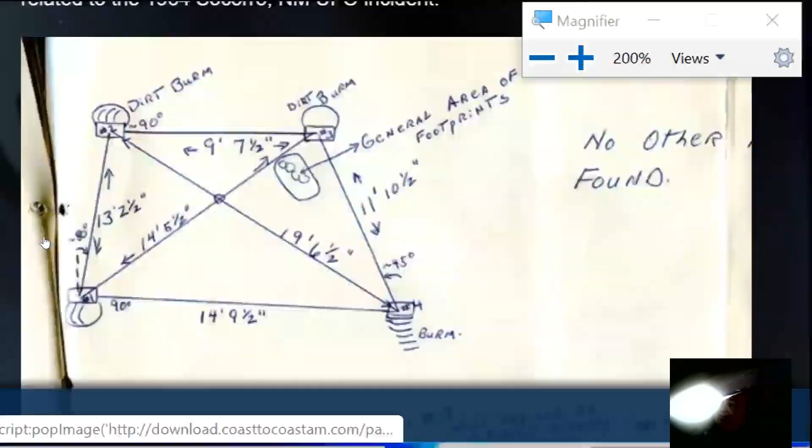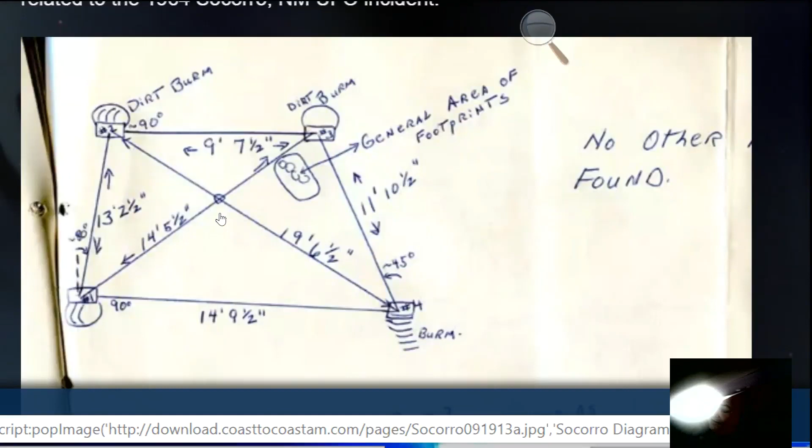So yes, this Socorro UFO that landed, they made some measurements in Project Blue Book. Now here it says it's 10.5 feet, although they say it rounded up to 11 here, so I'm not too sure what they mean. Maybe it skidded, maybe it skidded about a foot difference. I think that's what it's saying here. So maximum length was 11 feet, and the minimum was 10.5 feet.

And going this way it was 9.5 feet to 14 feet, I think that's what they're trying to say there. There it goes, rolls, okay John. Yeah, and here it's saying it's 13 feet, I suppose that's 12.5 feet to 13 feet that direction. So it looks like when it landed, the 3 landing pods stretched apart.

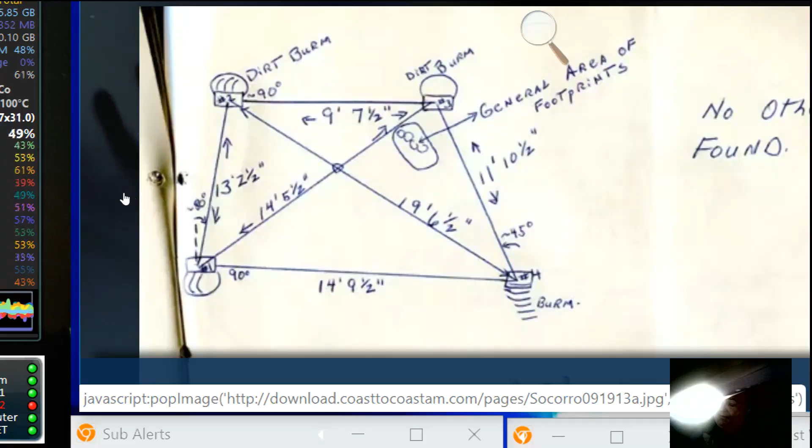So here it's saying 7.5 feet to 9.5 feet. So we compared this to the actual lunar module that they were testing, Surveyor 2 out that, well Surveyor 1, Surveyor 2, Surveyor 3 out that way. They had different things appended to it, different prototypes. One didn't have a robot arm, and Surveyor 3, I think they had this robot arm on.

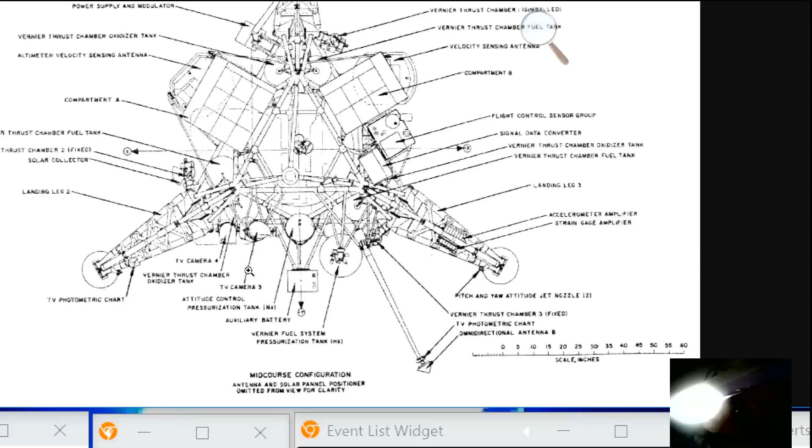Now, if you have a look at this scale here, it talks about inches. So you can see here, it's 80 inches apart probably, on this diagram here of the landing pods, 3 landing pods. One direction looks bigger though. Let's see, shame we can't put that scale going this way. It looks like 2 of those and a bit, so it looks like 100 that way,

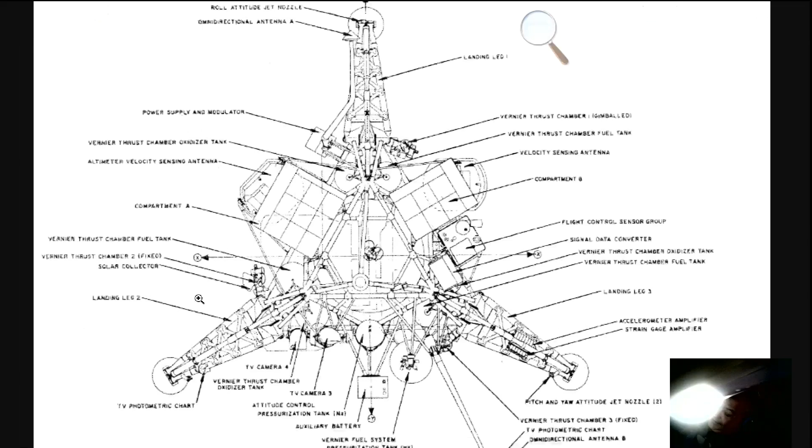Did you right click on it and give him thing? Or do you... I've given him everything he needs. I've just sent a message. I can see him inside now, so you have. Yep, yep, cool.

So 100 inches is 8 foot, which kind of matches that diagram which I'm showing you here of the measurements they took there. So 7.5 to 9 foot is 8 foot there. So obviously the pads will stretch as more weight's put onto it, it flexes with the terrain, so it becomes stable as it lands.

So what's 80 inches? 80 inches, 6 foot. That can't sound right. So where have I gone wrong?

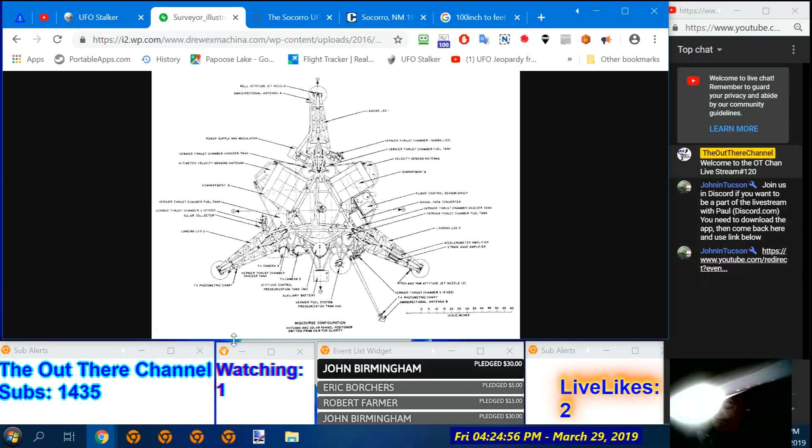Okay, let's see. Okay, I need a YouTube channel, don't I? Oh no, you're on the live stream now. Oh wait there. Yeah, so you just mute the live stream if you've got the right one and it should be displaying. But we've had no, it's not. If you've got the right one it should be displaying. Just make sure it's muted though, because you don't need to hear it. It's not.

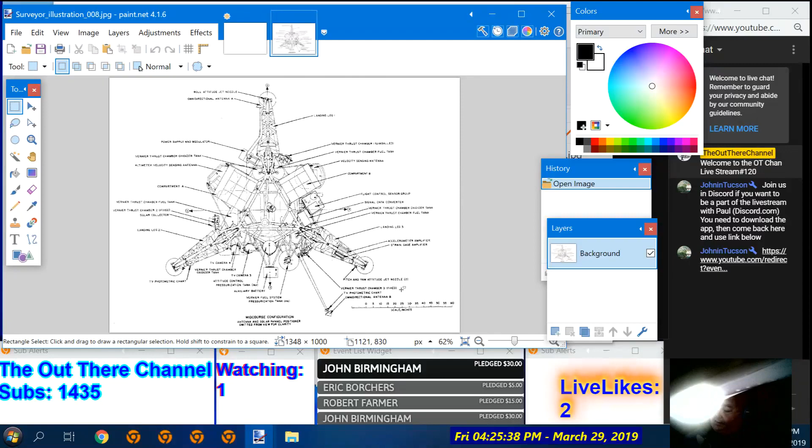Okay, so here's the surveyor blueprints. Let's see if we can measure this a bit better by taking a copy of this scale, 60 inches. Copy it.

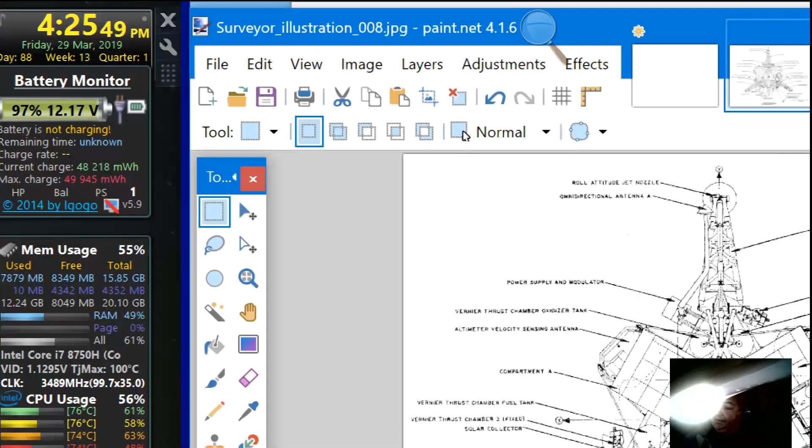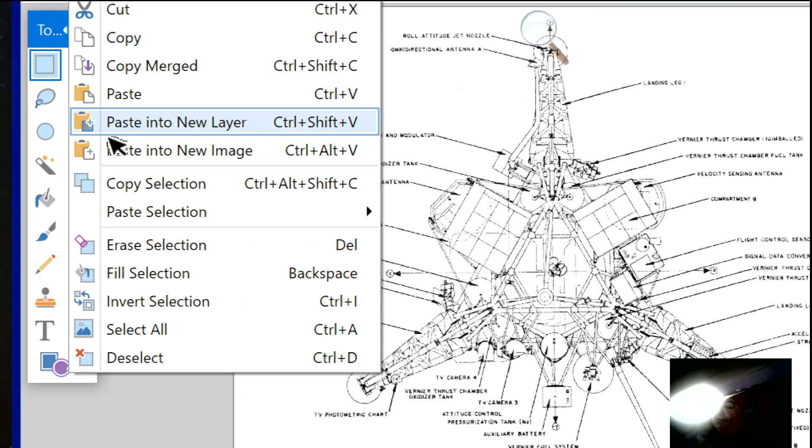I'm with you now on YouTube as well. Cool, you should be seeing what I'm doing. Copy and paste. You on headphones or what there? My headphones now, you hear this? Yeah, I can hear you fine. Cool.

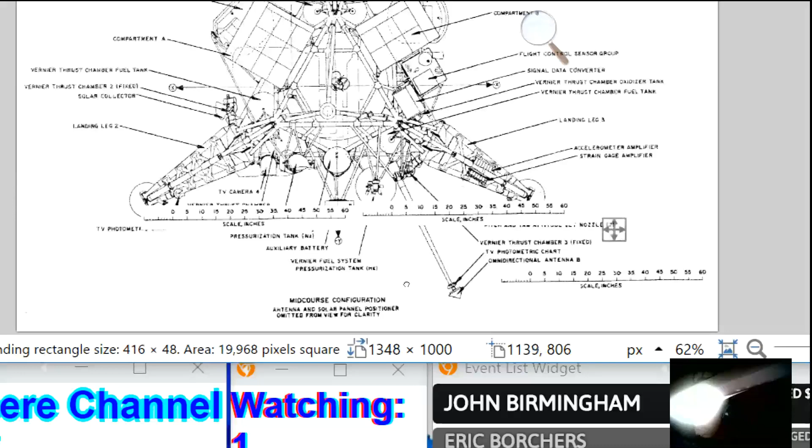Okay so let's see, we can measure the Surveyor pads' distance now properly. Well, there's 40. Let's paste into a new layer. So it looks like it's going to be almost two of those. So what's the distance between that one and that one is what we want to know.

See, I see they're on sort of like pivot points. Looks like they can expand some distance here. We really need someone that knows a bit about how the surveyor was designed, how much the landing pads can stretch. Looks like it's got what you call them, suspension - shocks. It's got some shocks on there. Obviously it's got some motion, so it can actually move another 20, probably another 20 inches. So that could easily go up to 100, eh? They could spread out a bit further.

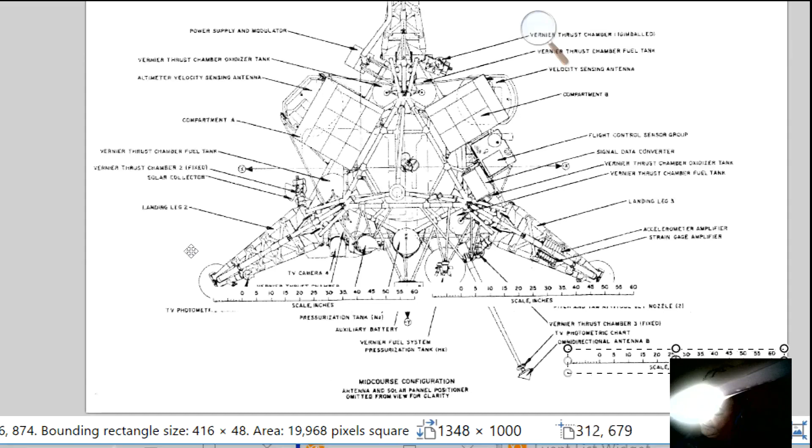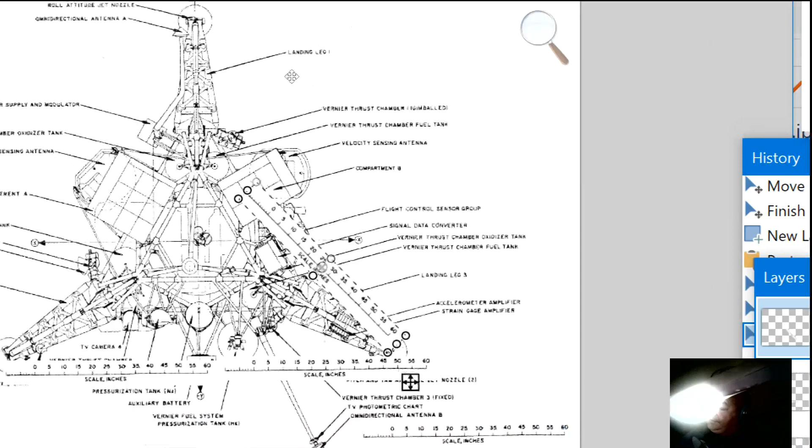So let's see, we need to get this angle one measured. Need to rotate it on an angle and then move it. So we want to go from that one to this other one on the end here. How can we angle it right about there? Then paste another one in.

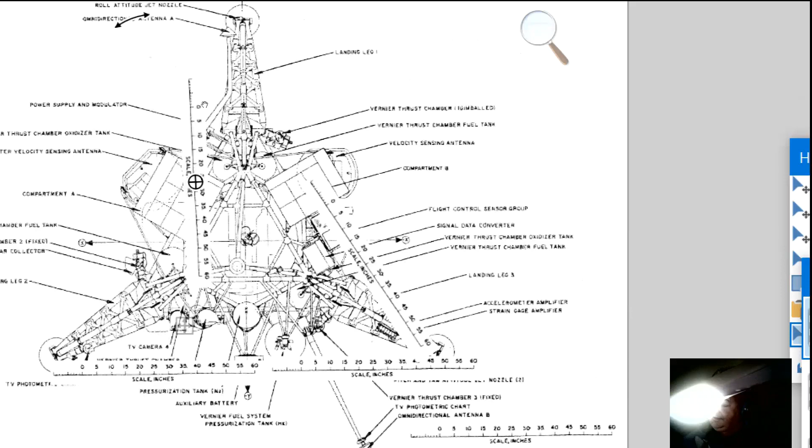It's good when you get some blueprints of things so you can actually see if it sort of lines up with the measurements they did at Socorro, whether it fits now to be a lunar module, or was it some other experimental craft NASA were working on. Well, maybe not NASA, maybe some other organization that didn't come clean. What do you think on that?

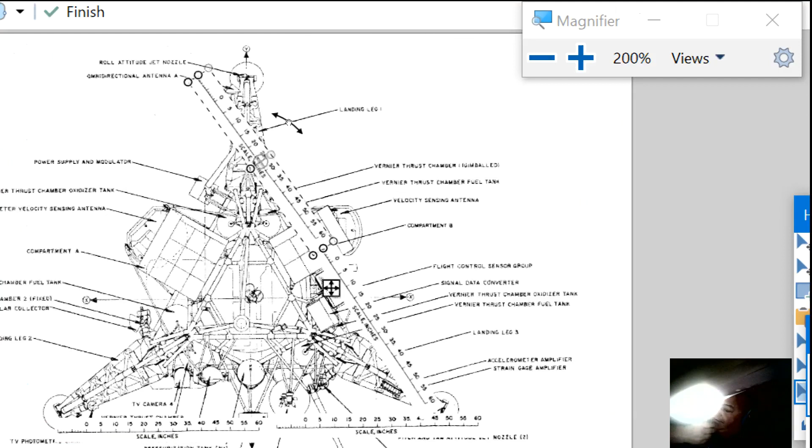We've lost them. So it looks like it might be symmetrical, even though it doesn't look like it on the screen. So they're about 80 inches apart and 20 inches with the shocks. They can spread out further, slide as it comes down. It can, with shock absorbers, expand another 20 by the looks of it. Looking at these here, it's about 20 on there. So that's pretty cool, that sort of gives us the idea now.

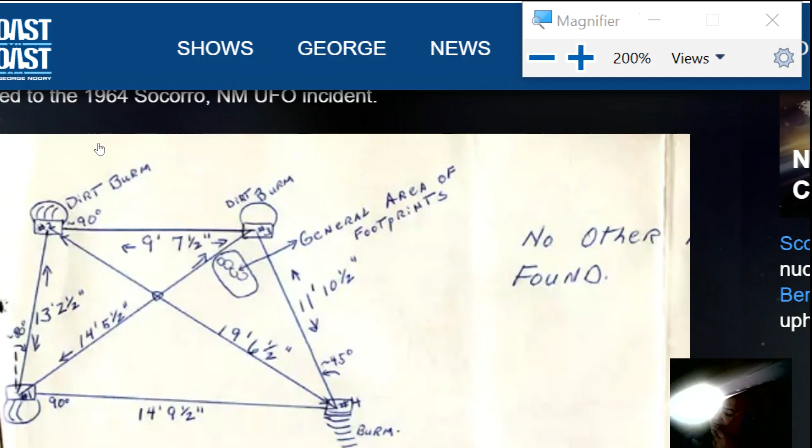Now what I'm thinking is, obviously as it's landing down with a helicopter, it's going to slide. So the mark's impressions probably landed on this one here, which looks like it slid a lot, and as it landed down with the other 3 feet. But is that a landing pad there too, or is this a landing pad here? I'm not sure what they mean here.

14.5 feet going this way, 7.5 feet going that way. See, the landing pads are not symmetrical on their findings. See that?

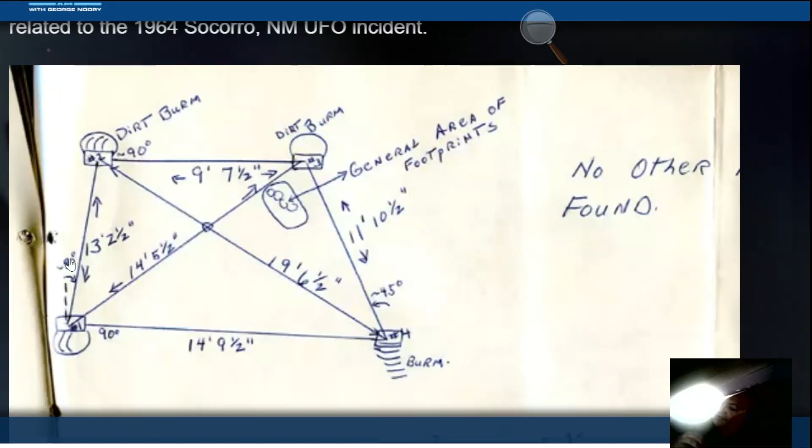You're not there. No, I don't believe it did. It had 3 landing pads, didn't it? From what his sighting was. Is it on this?

Oh, I mean, you have to go to the original source, and that was Hynek. Jane Fox shares images and documents related to the 1964 Socorro UFO incident. I believe this is from Project Blue Book or Hynek.

Who was the guy that did all the measurements? It wasn't Hynek, was it? It was another guy. No, it wasn't Hynek. Was it Steinman? No, it wasn't. It was... someone. I'll find out for you now.

Okay, I think he's the one that did this. It should be here on the diagram, though, shouldn't it? Let's see, I think it was Ray Stanford, and I'm not 100% sure now what his name was. I've read his bloody book, and it was a damn good book.

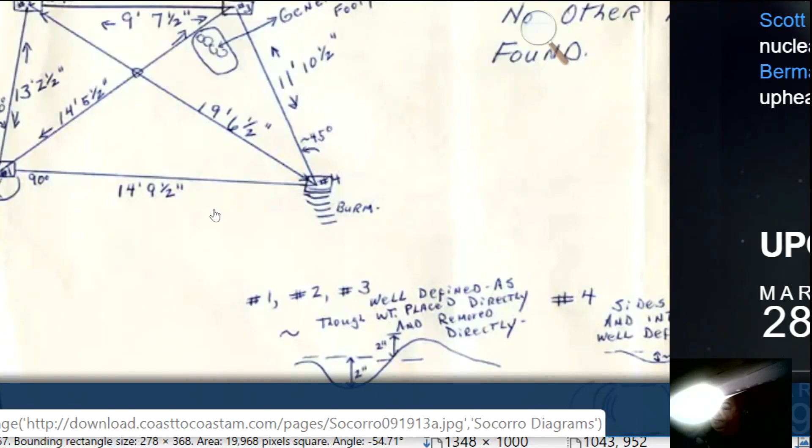So they're saying those two drew this diagram. Okay, so I'm just trying to make head or tail of it. So they said they found a pile of rocks that formed a four-sided shape. What do you call it? Trapezoid, or whatever it's called.

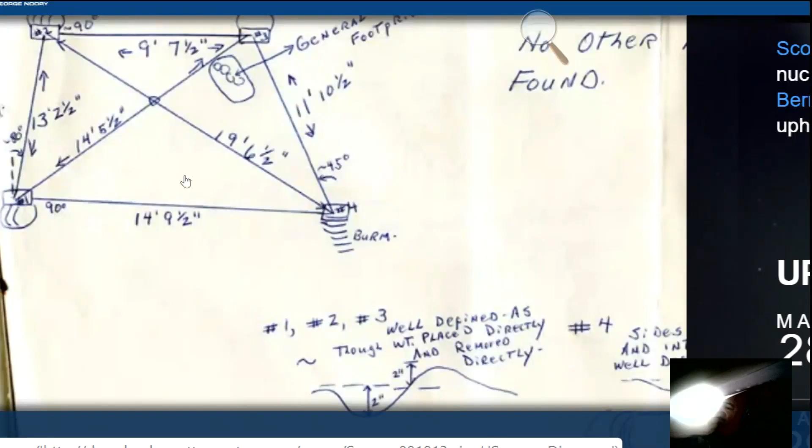An irregular shape here. So I reckon these are the landing pads here at the top, where they're saying it's 14 and a half, up to 9 feet, 13 feet. So it's irregular, so it must have slid, right? So one of these landing pads slid down.

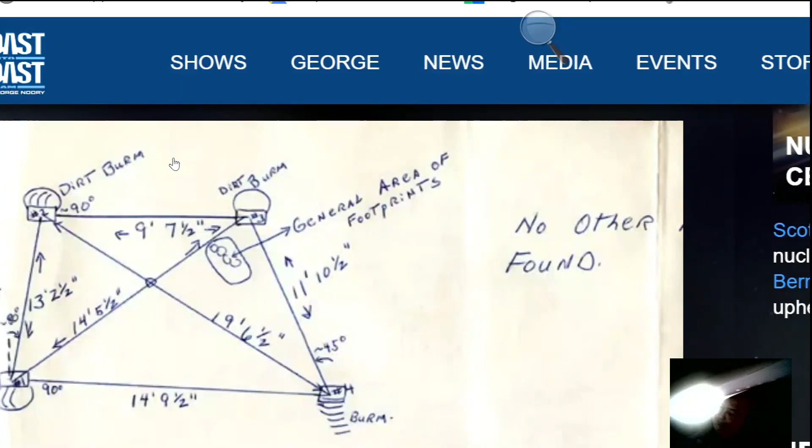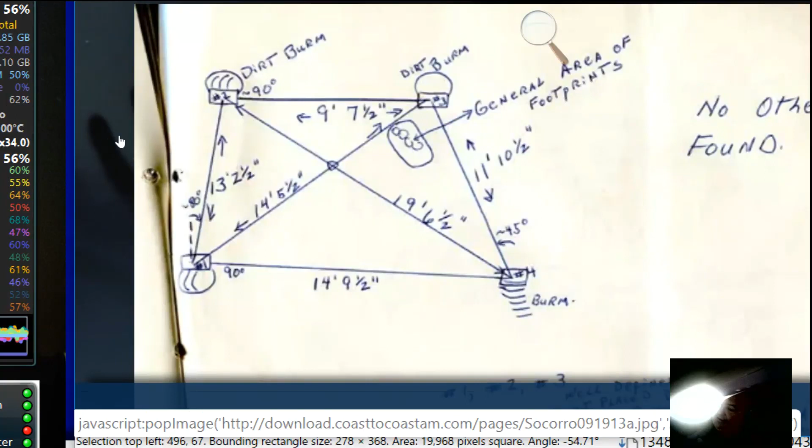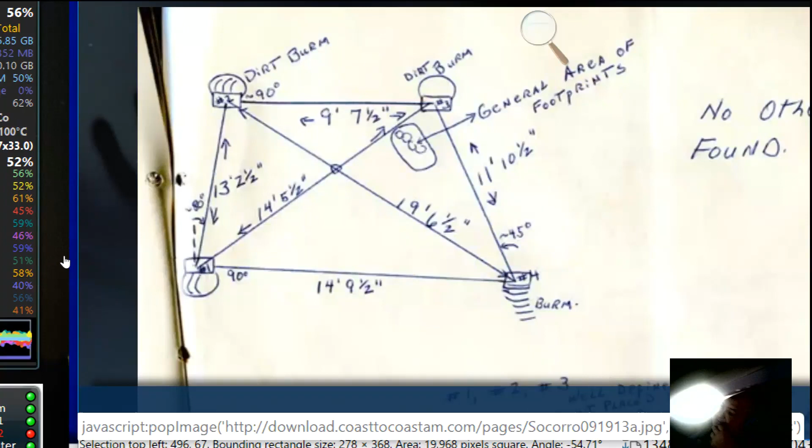Maybe they touched down the helicopter initially here, caused this marking to happen, then they moved the helicopter slightly over and landed down here with the lunar module, right? And then it slid down as it landed unevenly, slid here, created up to 9 foot, and then the shock expanders expanded it to 13 and a half this way. I suppose it could happen, right?

So we're looking at shock expanders being 100... so if we type 100 in, that was how many feet? I'm just trying to wrap my head around it. So they're saying it could expand, each of them could expand 8 feet, 6.5 to 8 feet. But if you land it sideways with a helicopter, right?

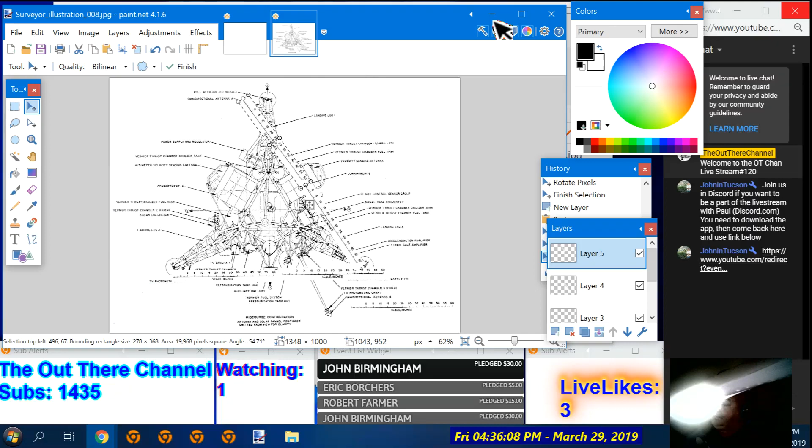So we have to bring up that picture we had of the strange helicopter they were using. I got it in my... Well, there was nothing particularly strange about that helicopter, to be honest. It was just a bog-standard helicopter.

Well, if you go through the sightings, it sort of describes the helicopter. We'll just go through the sightings in a minute.

Okay, I'm just trying... Ray Stanford, by the way, was the NICAP investigator, but he's not the one that did the measurements there on the diagram. According to that, they're saying it was an FBI agent, Byrnes, or whatever his name was. No, Ray Stanford also did the measurements as well. And what measurements? None of them came up with the conclusion that it was over 35 yards.

Yeah, but what's the landing pad measurements? Did he get landing pad measurements? Well, it's not really a case of that. Stanford's measurements had Zamora even closer than 35 yards. And I'm sorry, but Stevie Wonder would have seen a helicopter at that distance.

Oh, here we go, here's my original images. So I'll just bring those up.

So what happened to John? He disappeared on us. Where's John gone? I don't know where he's gone, but it's all right.

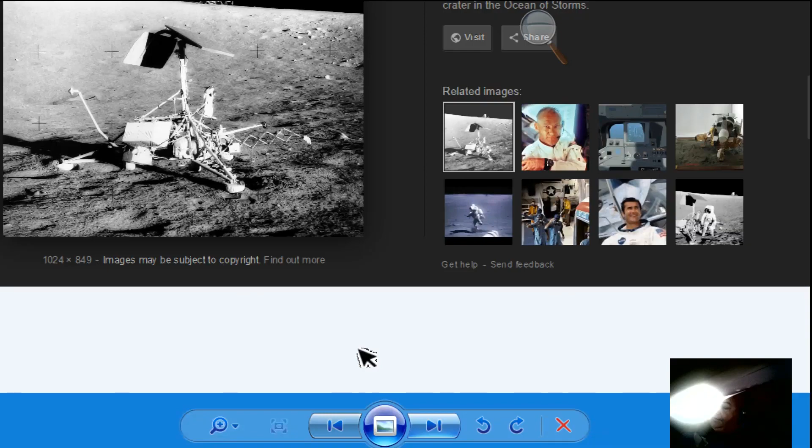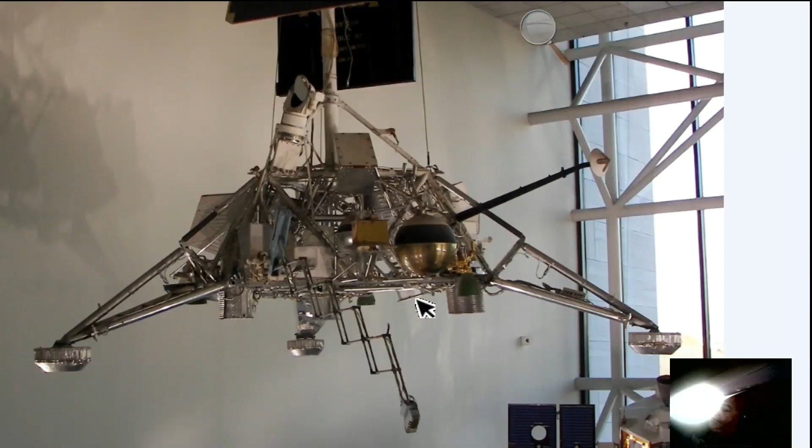There's a lunar module on the moon. There's it in the museum. There's the 3 landing pads with the robot arm. But you can see it has some sort of shock absorbers here, which allows it to spread these limbs like a hinge, so they can be - what is it - 6.5 foot normally, and when it puts the weight down, they spread apart up to a couple extra feet. So you can see how it could easily go up to 9 feet when it comes down. So that's in the museum, and there's his drawing again. I'm just trying to find the right helicopter.

Is that John joining us? Yes, okay, we got everybody on. It's been a frustrating morning trying to get this live to work.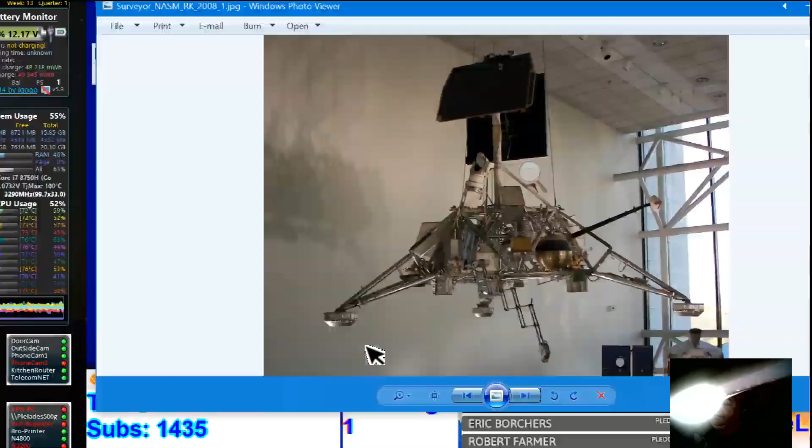So yeah, it's a strange helicopter that they used. We've got evidence that they were using it, and they said they attached the lunar module onto it. Here I've got the top bit removed, just the base with the rockets attached, but they probably had the rest of it on the side. So to me it looks like an upside down bathtub type helicopter - a really strange shape, as you saw in the pictures.

120 miles away from White Sands. Why are you going to do that? I think they were transporting it to the Air Force Base that day - Prototype 3 that had the robot arm attached to it. They already had Surveyor 1 at the Air Force Base, and they were doing testing there with the other helicopter, and this one was used for transport. So they had it attached, and I think they were coming from the tool factory.